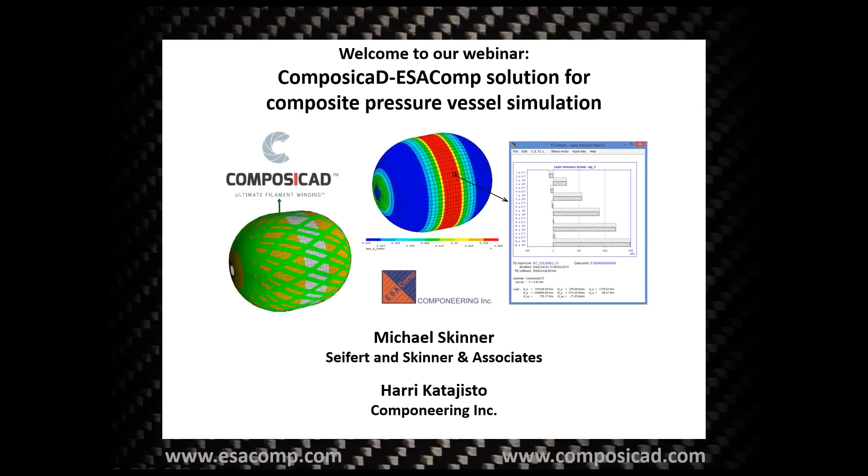To start with, just a short introduction to who we are. So from our side, Componeering, I'm giving the introduction, and then later Mike Skinner will tell about ComposiCAD and his company. So ESAComp is a software whose development was started already in the 1990s, initiated by the European Space Agency. It's a general composites design software meant to replace different in-house tools that were used in the aerospace industry. It's been developed by Componeering, our company.

We are based in Helsinki in Finland. We have also some staff in Central Europe, in Germany and France. Our activities focus on ESAComp software, but we do also engineering consulting. The customer base of ESAComp is quite vast. We have customers in more than 30 different countries all over the world. And all different industries using high-performance composites are practically covered today. Of course, because of our background in the aerospace industry, many of our most known customers come from that area.

ESAComp covers a lot, starting from basic laminate analysis, classical lamination theory-based analysis, first order shear deformation theory, and so on, focusing on the conceptual and preliminary design of composite laminates, but then going also into structural elements. We have a vast composite materials database as a starting point for design studies, and from ESAComp you can also export your data and initial designs into FE software, and even come back to ESAComp after the analysis done with the general FE software.

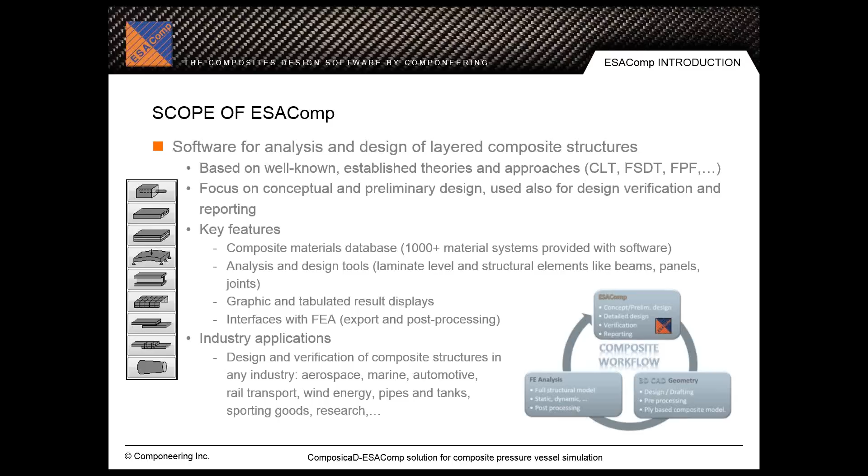Hello, this is Mike Skinner. I'm in Salt Lake City, very early in the morning here, but hopefully I can muddle through. I've got a cold, so if my voice sounds a little rough, that's why.

I'm going to first talk a little bit about our company, Seifert and Skinner Associates. I'm the guy in the hat. The guy in the red coat is Axel Seifert, my partner. We're actually standing in a wine field in France. This is a picture that was taken when we founded the company. We both have extensive background in filament winding for many years. And our company works in three main business areas.

We have what we call optimum CPV, which is our development facilities for developing and designing, prototype testing, and certification of composite pressure vessels. We actually have a laboratory in Belgium where we can produce these parts, test them, and come up with a good finished design. We also produce the ComposiCAD software, which is what I'm going to talk about in a bit. ComposiCAD is a fairly inclusive package that covers most filament winding. We do pipes, pressure vessels, of course, which is what we're going to focus on. But we also do curved structures like elbows. We have pipe tees. We do things that are called spars, which are non-round geometries, and a couple of other applications for ComposiCAD also.

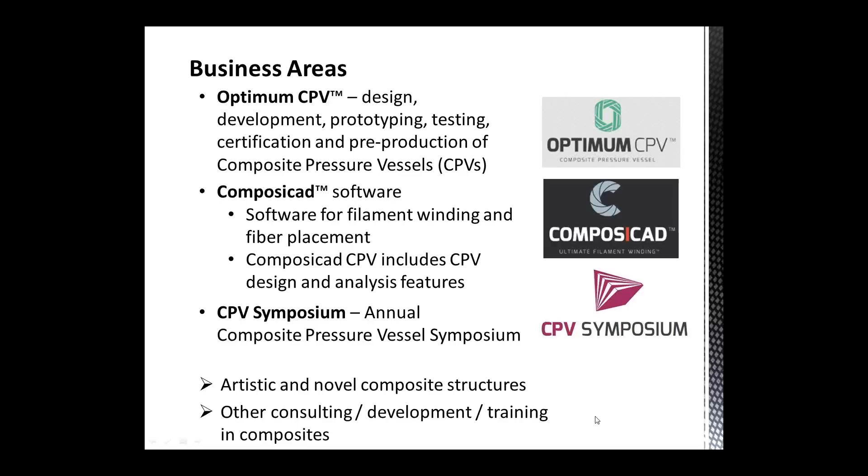And then we also do some other composite development work that is a fairly minor part of our business. We have associates all around the world. We actually have 3 offices. We have one in Salt Lake City, Utah, where I am, in Hasselt, Belgium, and in Mar del Plata, Argentina.

This is our development facility. We have 2 large winding machines, one single spindle and one 3-spindle machine for doing our development work. We have all the auxiliary equipment that you need to actually build and cure pressure vessels. We have testing equipment for both low pressure and high pressure testing, some environmental testing equipment, and we have ISO

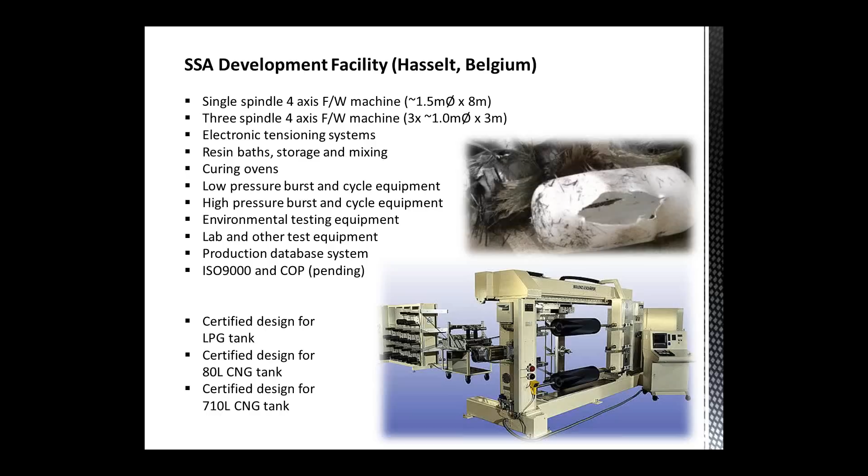9000 and COP pending. We actually have certified designs for several different types of tanks. We have an LPG tank design, which is a small low pressure tank, and we have 2 designs for CNG tanks. These are all type 4 cylinders, an 80-liter CNG tank and a 710-liter CNG tank, which we think is actually the largest cylinder ever to be certified.

Our main associates, we have associated companies around the world that we work with. Componeering in Finland, of course, is one. Composites in China.

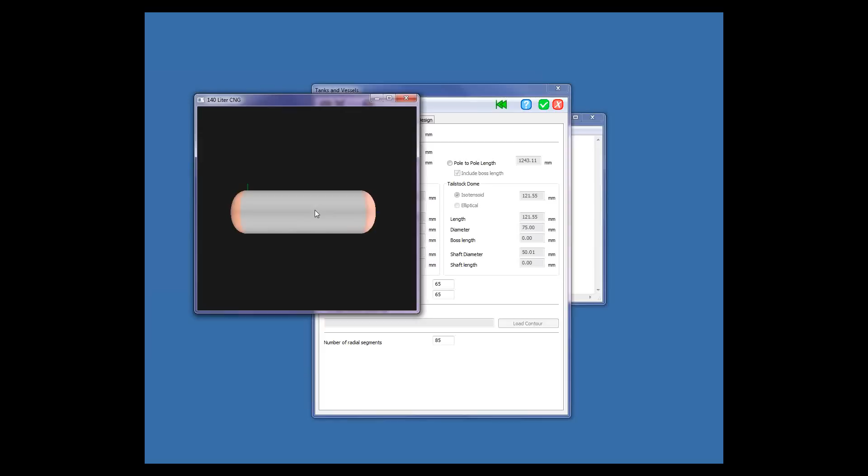And in this particular case, I entered parameters for a liner. This is designed for a 140-liter tank. This has isotensoid domes. Typical geometry. One of the more recent features that we put in ComposiCAD is a design tool that will allow us to estimate how much material we need for specific burst pressures.

This tool is based on netting analysis. It neglects all of the rest, and it looks solely at the fiber strength. It's a little more detail than we can go into here, but it gives you a good first approximation of how much material you need in a vessel for the required burst pressures.

So in this window, we can put in our operating pressure, desired safety margins, and come up with a desired burst pressure. Look at our helical to circ fiber stresses. We typically want our tanks to burst in the circ direction, not in the axial direction, not in the helical direction. We put in our parameters for the materials that we're going to be using, which we can specify.

Here we're looking at a T700 epoxy material. We specified two different materials, one for the hoop direction, one for the helical direction. This is typical because of the manufacturing process. With hoop winding, we're typically going to have a little bit wider bandwidth than we have with our helical winding, just because of the geometry and the mechanics of the winding machines.

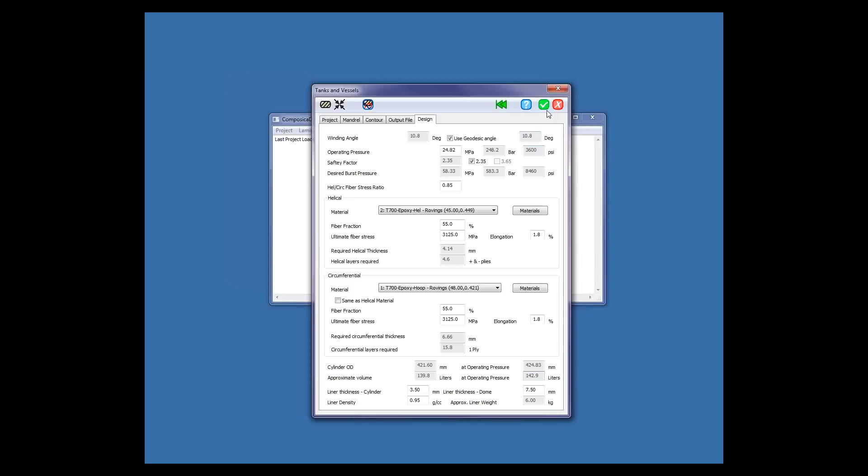And it also calculates our volume based on the information that we supplied. So unpressurized, our tank is 139.8 liters. At operating pressure, it's going to be 142.9 liters of volume. So now we can specify our laminate structure.

Again, ComposiCAD is parametric, so each one of these layers builds on the previous layer. This laminate sequence would be typical for a CNG type tank. We start with a hoop or circumferential layer. We put in some helical layers, another circ, some more helical layers, and then finish off with a circ on the outside. There may be other geometries that would work as well. This is not an actual tank. This is just something that we're using for demonstration.

But once we build this laminate sequence, then we can calculate all of our winding paths. Each one is based on the previous winding path and the buildup of the material that is put onto the part by that particular layer. Now we can look at our cross section. I'm going to expand this so we can see it a bit better.

This is just looking at the dome contour of the part, so you can see each layer that we're putting on. The green layers are actually the circ layers, which would be in the cylinder region, where the buildup's going to be. But we're looking at the helical buildups now, so each blue layer is a helical layer that we put on. So you can see that we're stepping back the helical to keep the buildup around the dome to some reasonable level.

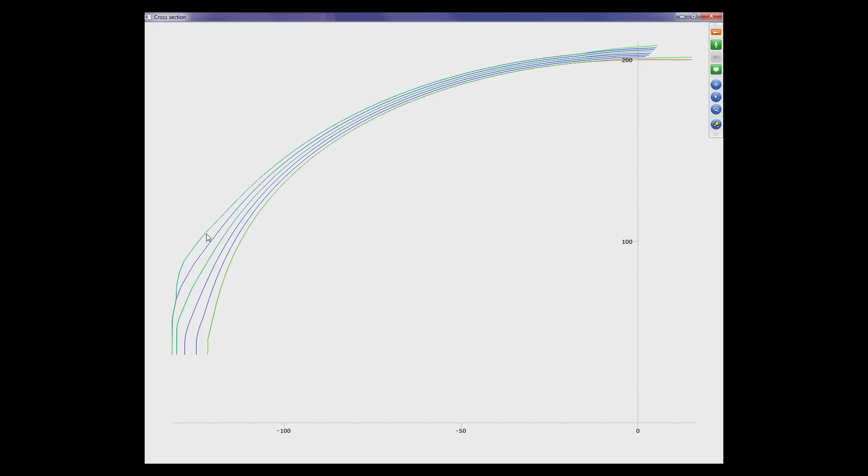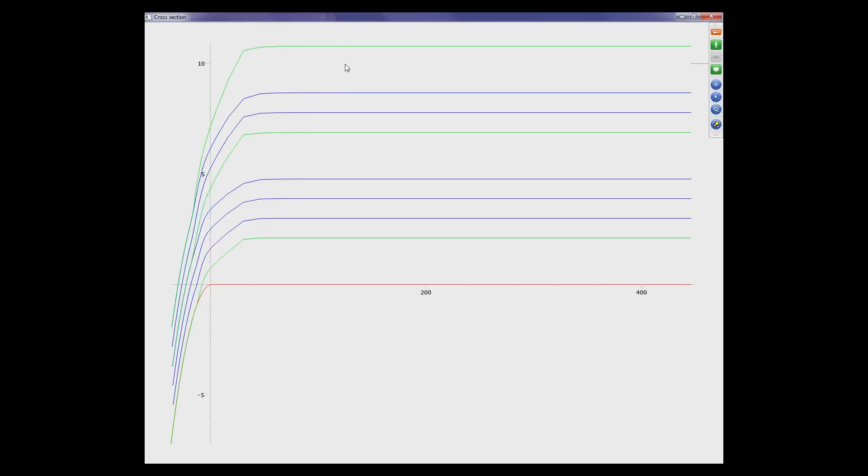Here's the cylinder region. Now this is the transition going into the dome from the cylinder. You can see our first circ, the helical layers, our second circ, some more helical layers, and then our third circ of the material that's being put on the part.

Now based on this particular laminate sequence, we can calculate the burst pressure again using our netting analysis. And from this, we can decide whether our design is going to be appropriate for the desired burst pressure. So based on the actual buildup that we have in the laminate table, the circs and the angles of the helicals, ComposiCAD will calculate that design burst pressure.

So using our design values, we have a circ fiber stress of 3125 megapascal, and helical fiber stress of 2656 megapascal for a stress ratio of 0.85 between those. That's a typical value for these types of tanks. Some people might go a little higher. But like I say, we want the stress to be primarily in the circumferential direction so that the failure mode is in a certain direction.

Now we come down, we look at our design pressures, and we say, oh, over 100% of our design pressures. It took me about 2 hours to actually do that, so it came out exactly 100%. But typically, you don't need to be 100%. You're looking for some value that's going to be close to what you want, and then, using some of the other analysis tools, we can tweak those values a little bit.

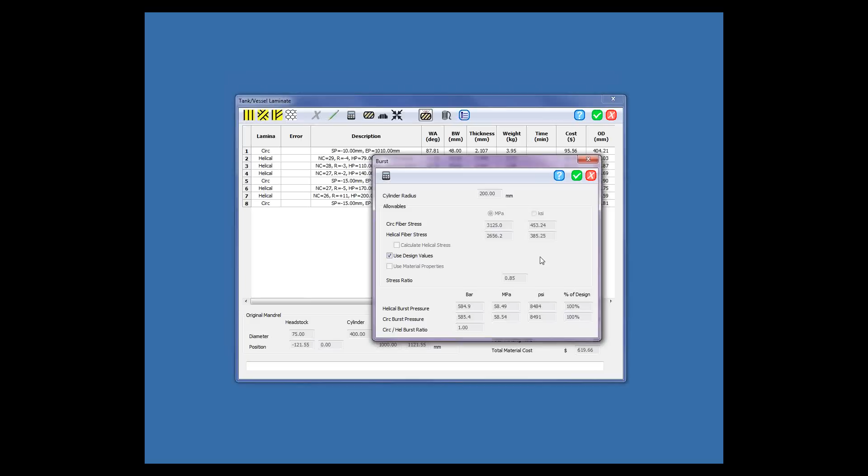And now we actually have our part. Everything's ready to go. We can export now to ESAComp. I'm just going to mention in passing, we support ESAComp. We have a couple of other FEA tools that we support also. We're trying to support most of the major FEA packages so we can export to them also. I'm going to export now for ESAComp.

We'll do a full part, specify our number of segments, direction. And we're just going to save that data. A few seconds to calculate it. And here's our finished part in ESAComp. And now I'm going to pass this over to Harri, who can talk some more about ESAComp, I think.

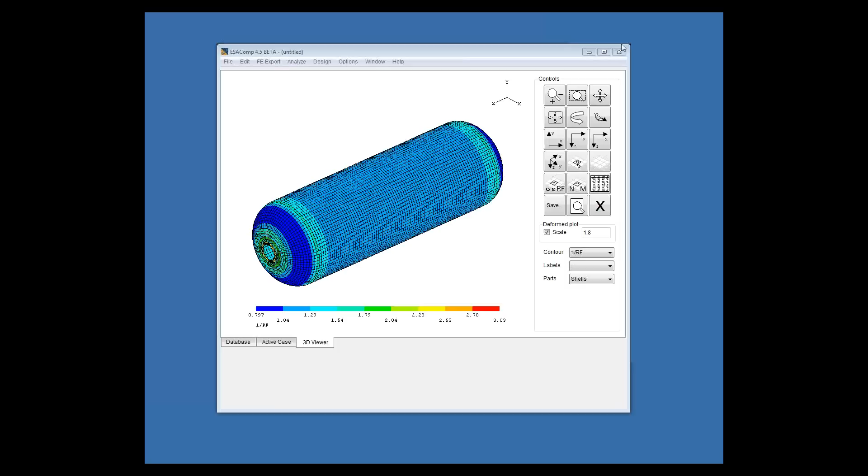Thanks, Mike. My name is Harri Katajisto. I'm an engineering consultant at Componeering, and I have around 15 years of experience from industrial composite projects. I have a background in mechanics of materials and lightweight structures, and I'm a member of the NAFEMS Composites working group.

So now I'm going to introduce you to the simulation part, and I'll shortly go back to ComposiCAD. So I have the same model here open, the one Mike showed you. You can see the geometry here, and also the mesh overlaid on top of the geometry.

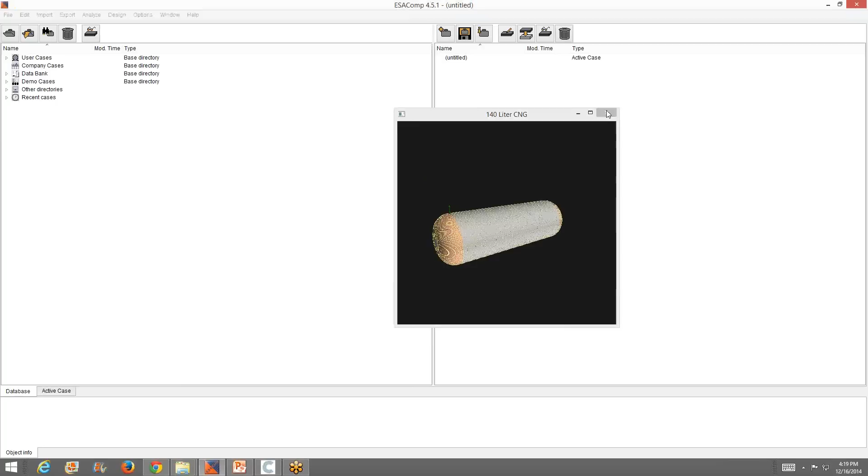Okay, and what Mike showed you about the export of data to ESAComp, I will repeat that one. So I select the ESAComp drop-down menu, and now that we do a structural simulation, and because the tank is symmetric, I just simulate the 1/2 to save some time in the computation.

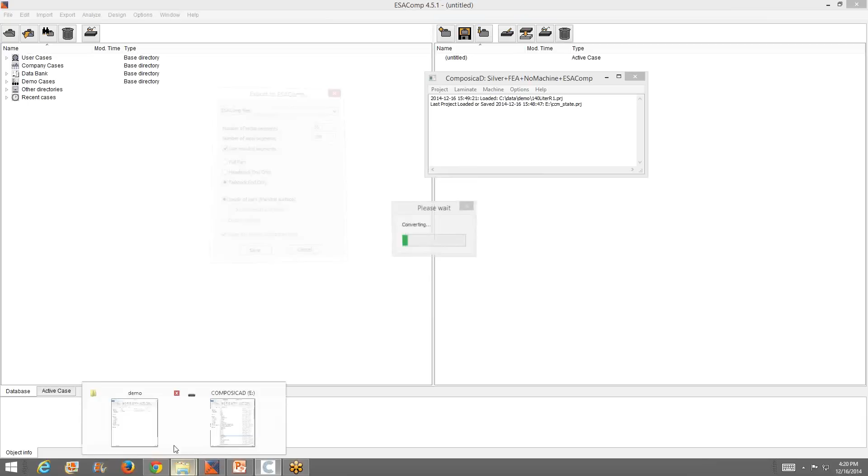I could use the default parameters for the mesh, but actually I will change the settings to the ones showed previously. So I will do the export. I will specify the folder for the different files, and here is the folder open. So basically

what is read in ESAComp is 3 files produced by ComposiCAD. 2 of them define the finite element mesh with shell elements and nodes, and the third one introduces the laminate data. Also, in this specific file, the materials are introduced, so you can cross-check that you have the same data used in ESAComp and in ComposiCAD.

Normally, when I work in ESAComp, I have a template file where I have introduced materials that have been used in the winding simulation, but now I'm starting from scratch, so I'm going to introduce these 2 T700 high-strength carbon fiber material systems.

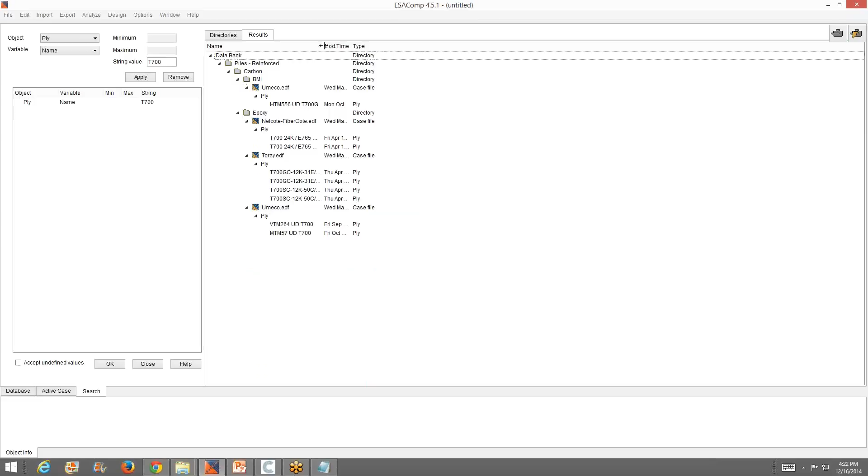What I'm going to do is I use ESAComp search function, and I will search from the database materials with ID T700 from the data bank. And as a result of the search, there are some systems matching with the search criteria. And for example, the one that I'm going to use is the one at the bottom from Umeco. So to introduce, the data has been gathered from the Umeco structural materials sites.

It's a UD system with a fiber volume content 56%, so sufficiently close to the one Mike used in the winding simulation. There are engineering constants and then nominal failure values that are going to be used in the simulation. These are the nominal values for the UD laminates, but I'm going to introduce another strength set here, which I'm going to use in the later phases of this demonstration.

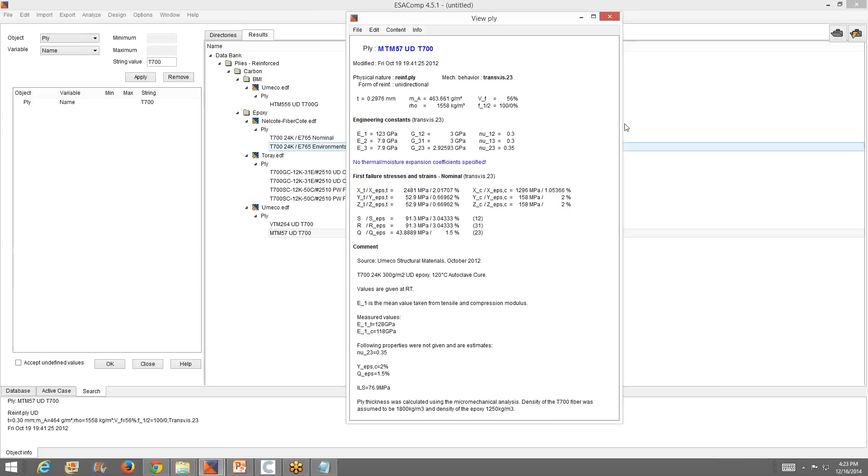So I will import the material into the working project, and I will close this search function. So I have here the material system, and I will modify the data by introducing an additional strength set called fatigue.

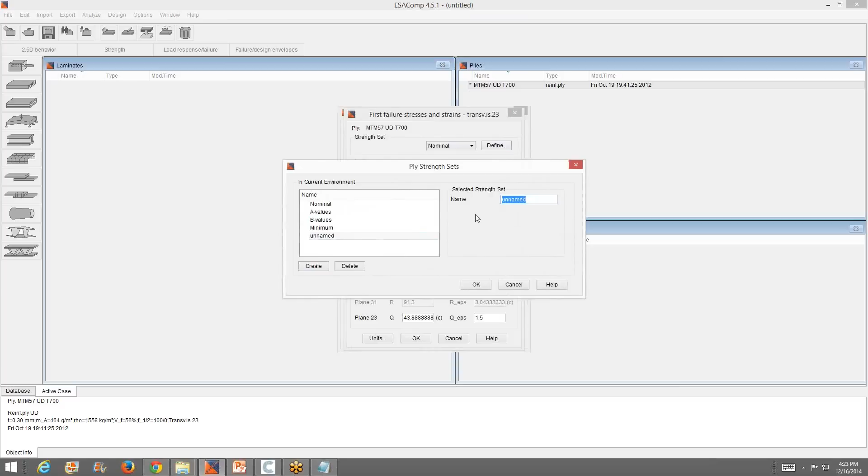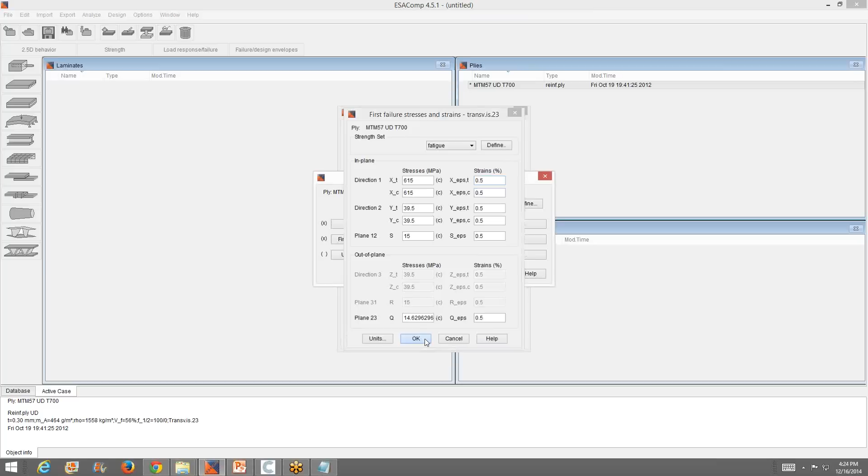Well, let's say that based on my knowledge, I think that 0.5% global strain level is a good approximation for a certain number of load cycles. So that in a simple manner presents the fatigue limit for this material system. And now, in addition to the nominal values, I have the fatigue values here based on the 0.5 strain level.

Before performing the actual simulation, I have to give a material ID for the material system so that it matches with the material system of the process simulation. So I will go back to ComposiCAD and then materials. Mike showed you this specification window. So in ComposiCAD, material ID 1 is used for a hoop.

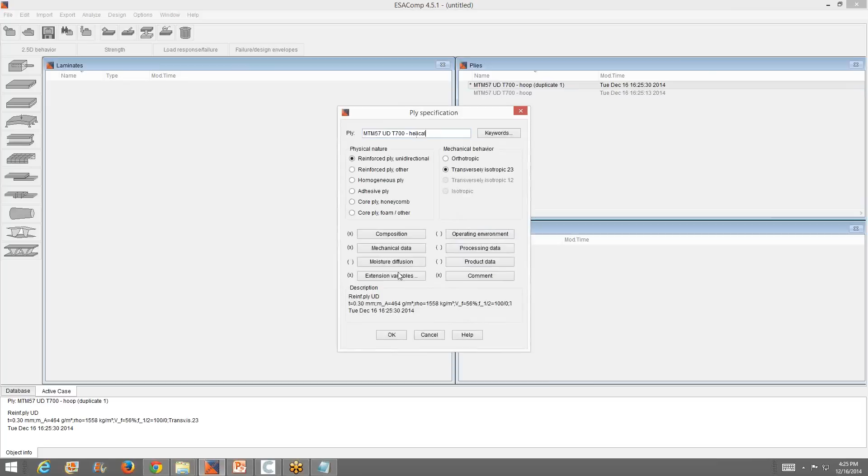So I will slightly modify this. I will define hoop and then define the actual material ID so that it matches. And then in the structural simulation for the helical layer, I will use the same structural mechanical properties as for the hoop layer. So I just duplicate this material system. Modify the name just to identify and give a proper ID.

So when you repeat your analysis, the previous steps you don't have to redo. This is something that you can take from the template file. Now I'm going to the actual simulation. So I just read in the data from ComposiCAD. I specify the file,

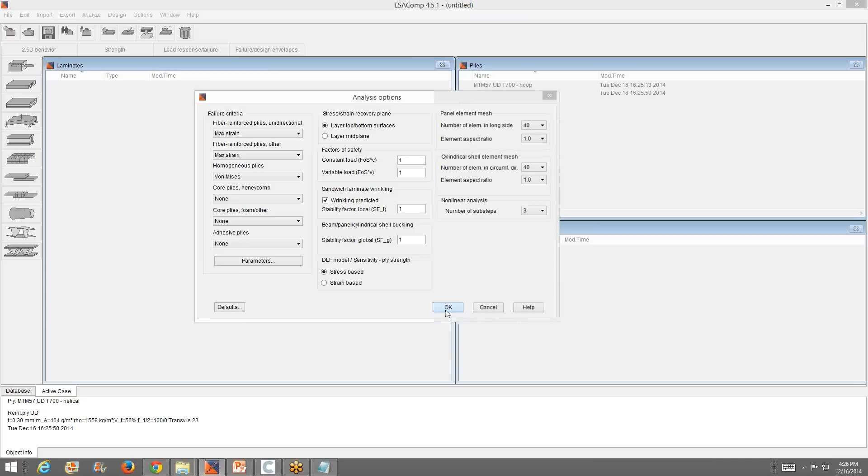and before launching the simulation, I can select the failure criteria that is going to be used for the UD material system. There are different criteria available, but I start with the max strain criteria. I start the simulation, and it takes like 10 seconds to run the simulation, and now it shows you the half tank. So we just simulate one side of the tank due to the symmetry.

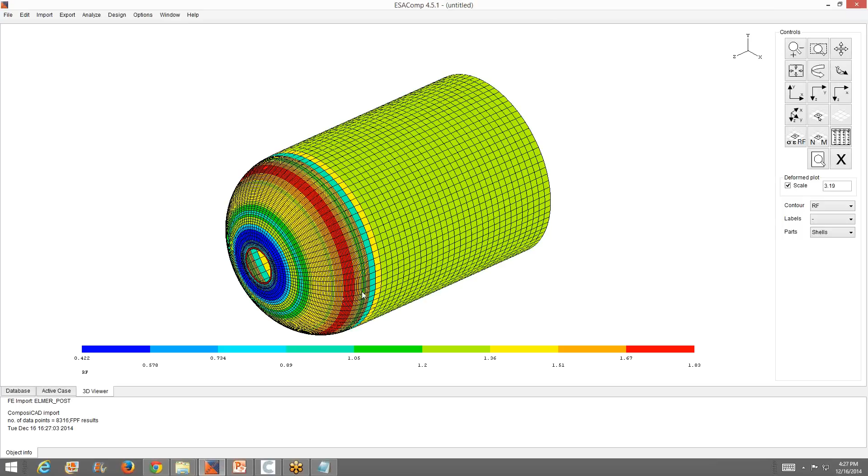RF indicates reserve factor for the laminate, so it takes into account all the layers of the element. So it's like piercing through the laminate, and then giving the indication what is the reserve factor according to the weakest ply of the laminate.

The critical layer information can be seen on top of the laminate. So, for example, in this region, it's the layer A. A stands for the layer that is introduced first in the laminate. It's aligned in -88 degrees. So from that information we can judge that it's a hoop layer.

Failure mode. In this region, for example, it's 2T. T stands for tensile failure, and 2 stands for the principal direction 2 of that specific critical layer. This information naturally depends on the selected failure criteria. Now we have selected the max strain criteria.

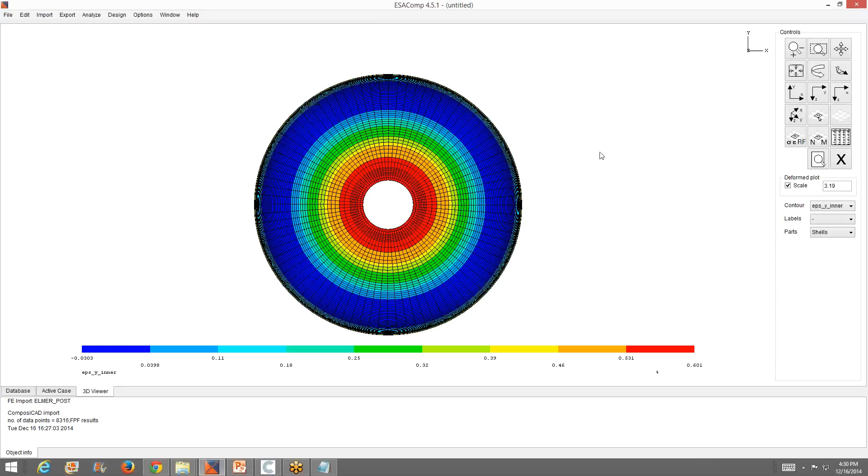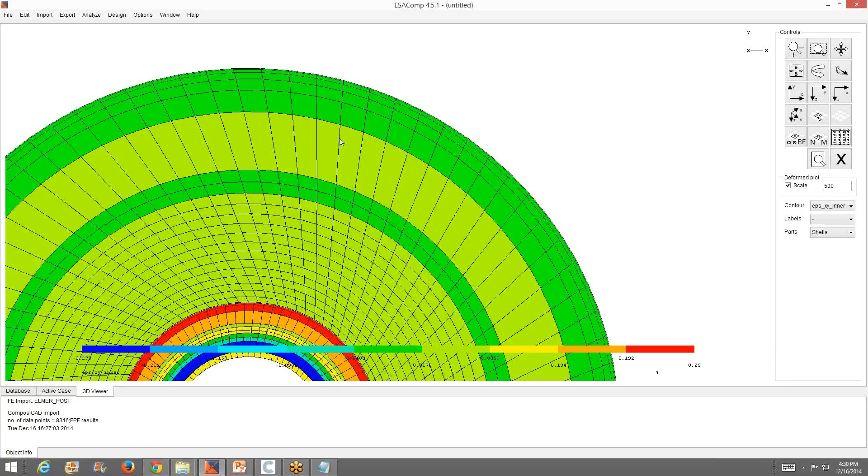I will take a view from dome direction, and now I will plot the in-plane shear. I will scale a little bit, or actually quite a lot, the deformation. And you can see how the tank distorts. So because the laminate structure is not symmetric, there's a bending moment in the dome region, and therefore the tank shears.

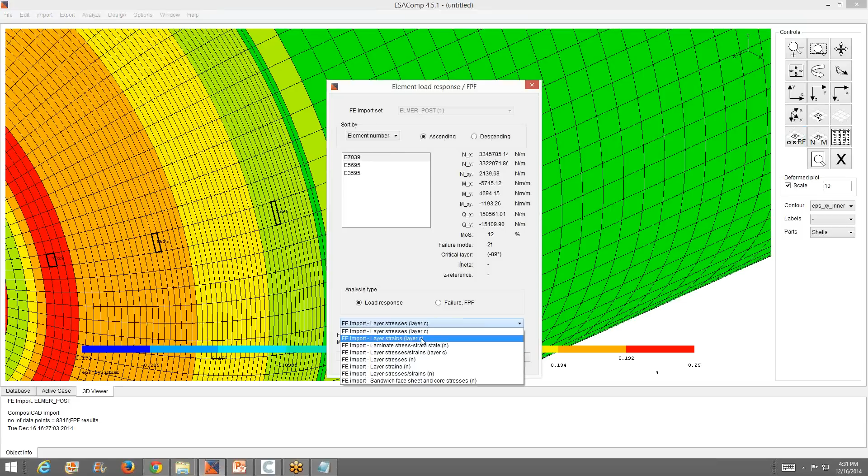One can do a point-wise analysis, so that means that I can pick elements from the model and study locally, for example, strains either in the local coordinate system or global system. So this one is for that point here, the next one.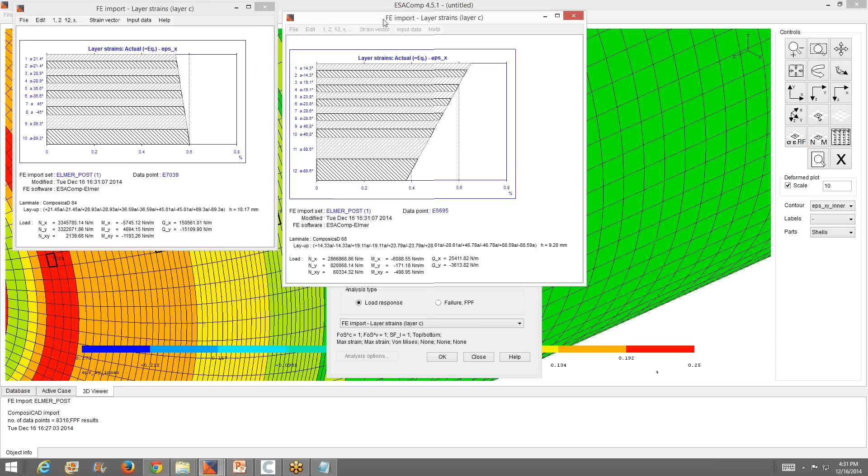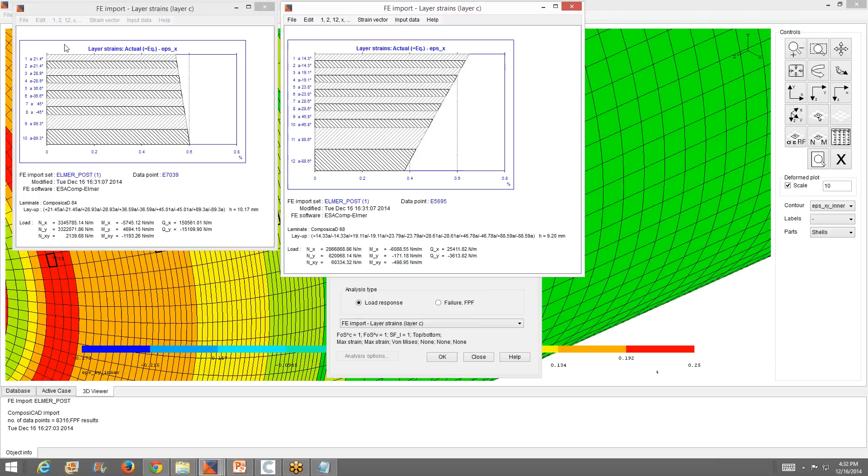And then so on. So here you can see the different layer orientations, and for example the layer that is in 14.3 direction at this region, it's heading to the point where it turns to the opposite direction, and the orientation has increased to 21.4. So one can do this kind of local studies.

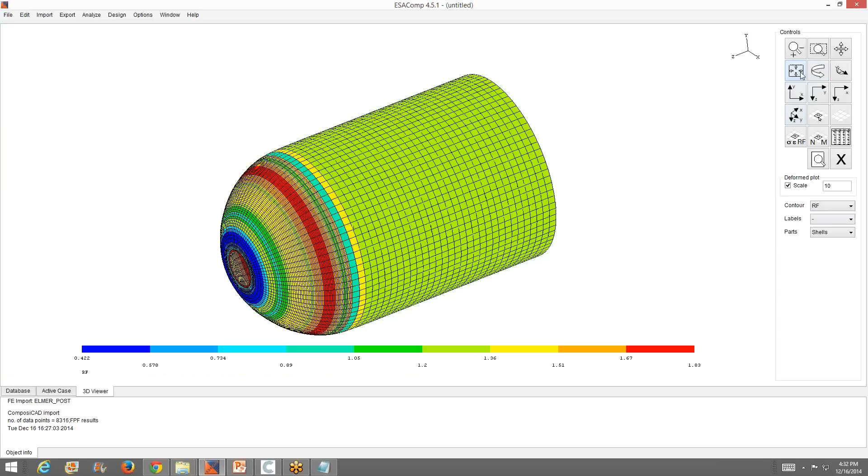Back to this reserve factor, and this is something interesting region here. Why the reserve factor is lower at this region, and the mesh is rather coarse. So I decided to make another design loop with different mesh parameters.

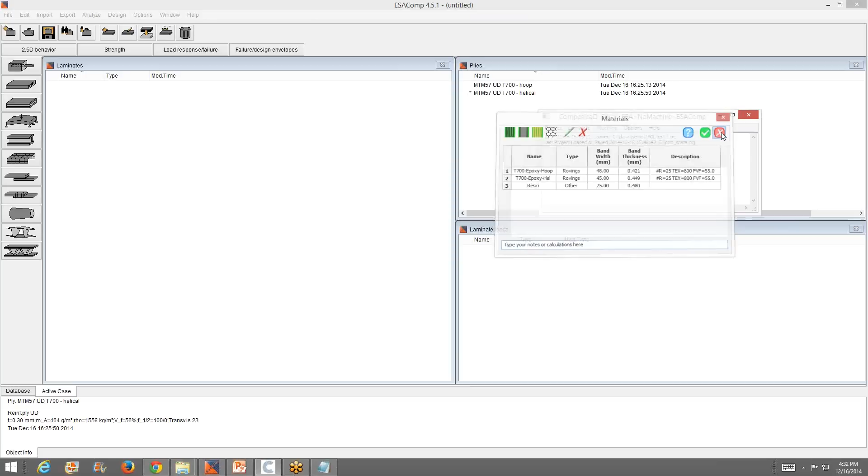So I can go back to ComposicaD. I will go to the actual project and the mandrel data. So here was the original mesh and original length. For the second round simulation, I will shorten the tank. It doesn't influence the results at the region where I'm now focusing. I will slightly change the mesh parameters.

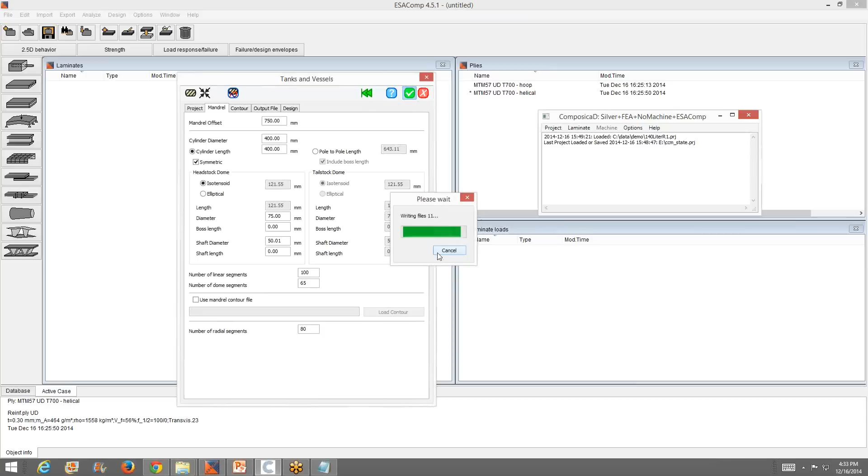And the paths are recalculated, and I will export the data to ESAComp, tailstock end only, and I have the updated data in my demo folder. Basically, I could rerun now the model, but I will do one more modification before rerunning the simulation.

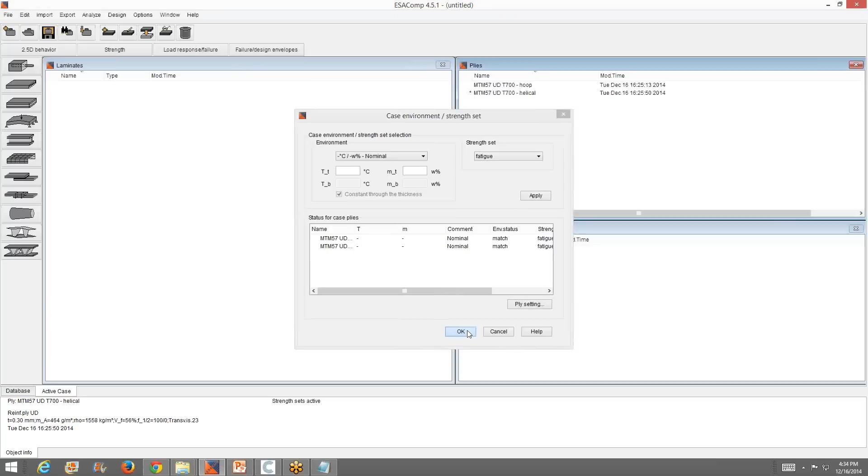So I will go to the options, and I will now activate the fatigue values for the failure analysis. Previous analysis was made with the nominal values, but now this one with fatigue values. And I will repeat the analysis, and again it's something like 10-15 seconds calculation time, so it's really responsive.

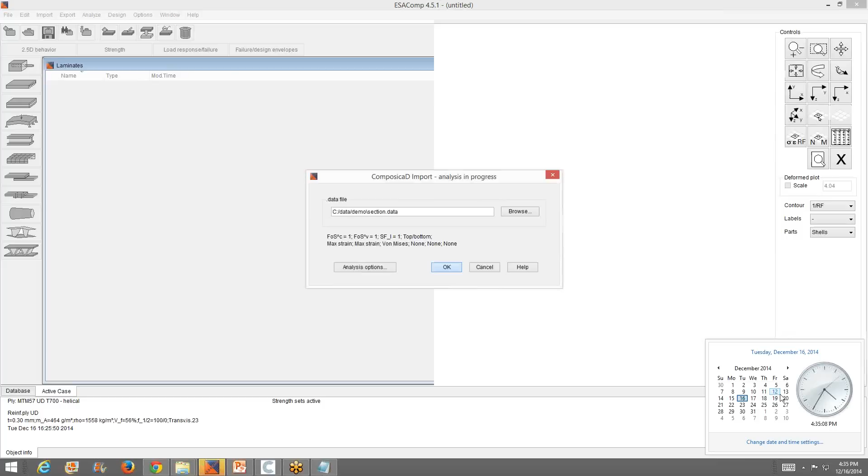You can do a lot of what-if studies, like if you see something, you want to try something, you go back to ComposicaD, make the modification, and then export the data back to ESAComp and then rerun. So now the mesh is different.

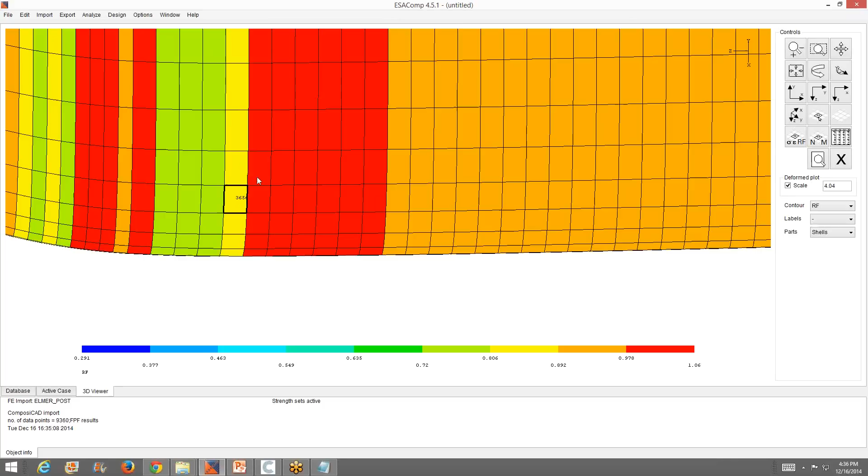Still there's some oscillation of the reserve factor at this region, and I will make a point-wise analysis at this region. So far, the failure analysis has been made only using in-plane failure criteria, but by experience, you may know that the typical region where the tank fails is this one. So let's take a look at this region more closely with the local analysis.

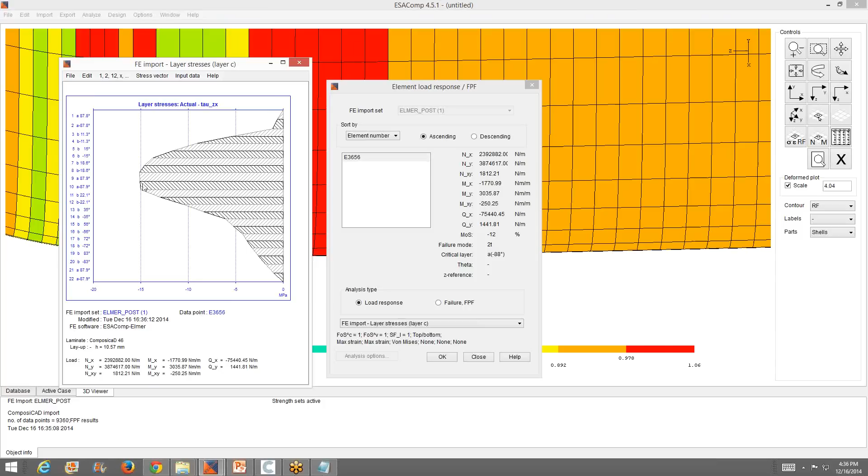And the strains, there's nothing exceptional. They are pretty close to the fatigue limit that I have used. But I will take now the stresses, and more specifically I will take an out-of-plane shear stress. So it's moderate in this region, 15 megapascals.

Let's study the neighbors, or better. Actually, there's a better thing to look at, the result item QX. It indicates out-of-plane stress resultant. So previously I showed you the out-of-plane stress distribution. This QX is like one item that shows the resultant of all the layers.

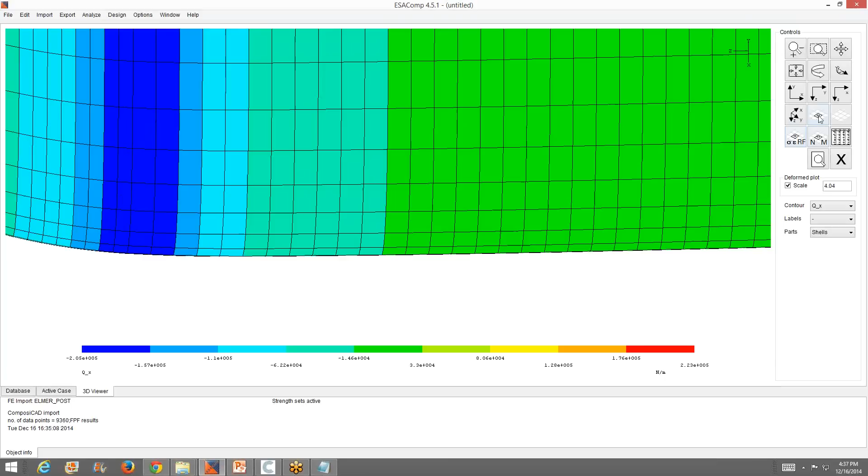So this gives you a nice overview where you have an oscillation of the result items. So in this region, QX has a high peak, and I will pick an element from that region. And I study that one locally, and it's over 40 MPa.

Actually, it wasn't straightforward to find that critical region from the model. So I will go once more back, and I will change the analysis options so that also the out-of-plane is considered. One possible way is to select max stress 3D failure criteria and repeat the analysis. And waiting for the results.

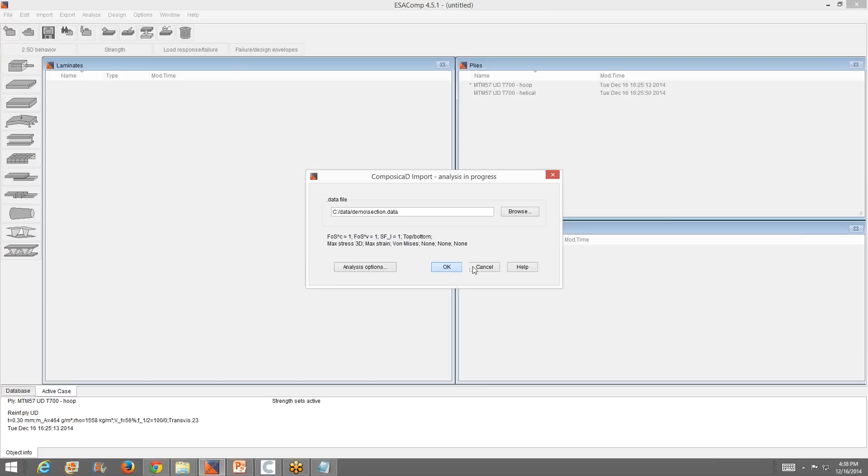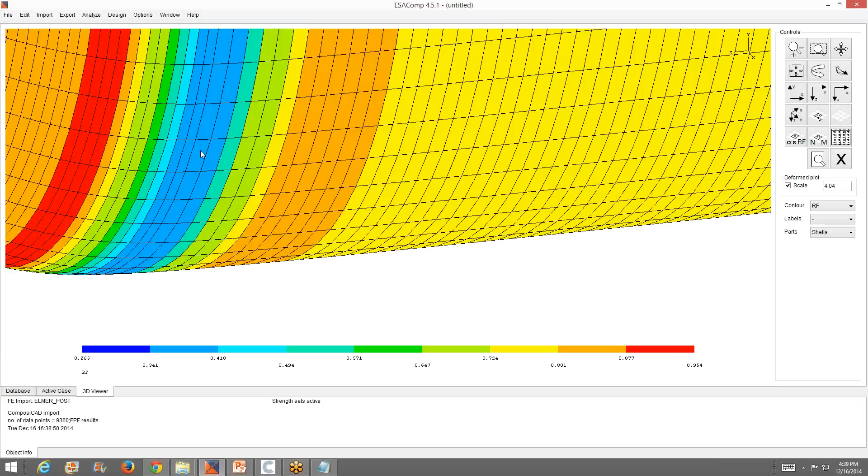And now we have a clear indication that this region is a potential location for failure due to the high out-of-plane shear stresses. So potentially these high out-of-plane shear stresses induce delamination, and delamination increases, and that makes the tank fail during the cyclic loading. So this QX was quite a good result item to reveal that there is some change in the structure at this region.

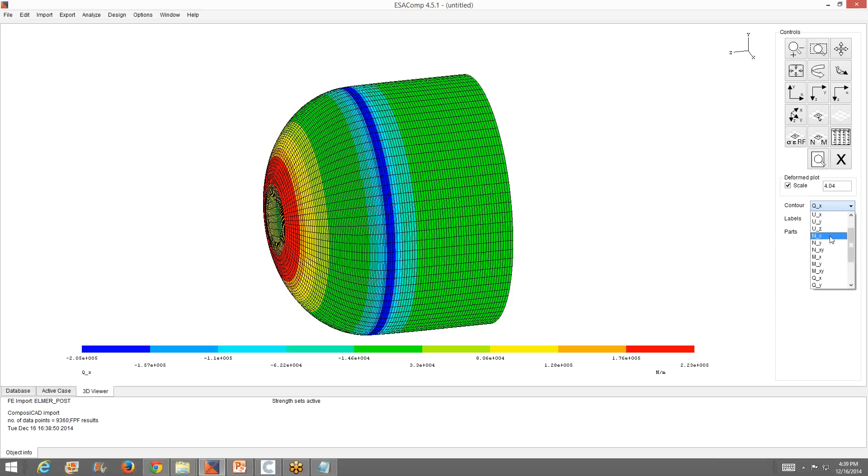Other result items like NX indicate the stress resultant in the in-plane direction. So these are quite useful to see how the structure will change the state from one to another, moving from the tank part to the dome. We also have capabilities like the data can be visualized in numerical formats, it can be exported to Excel, for example, and then the data can be processed in Excel if you find that a good way of working.

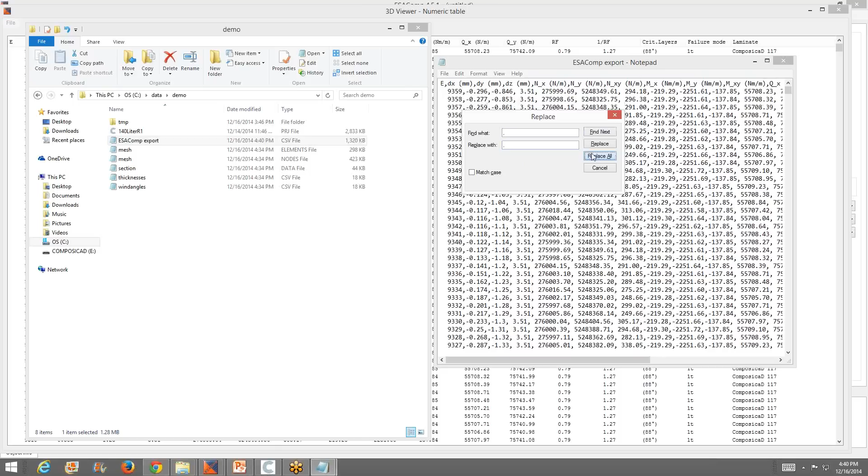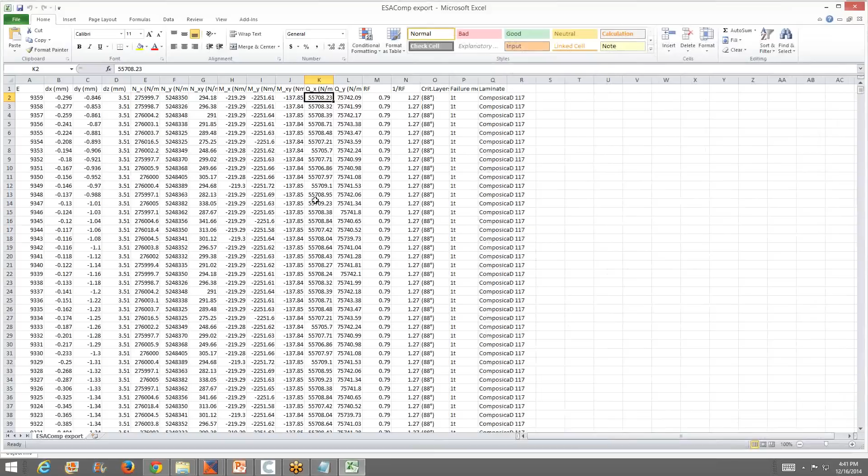I will actually modify these semicolons to commas and open that in Excel and show you the QX, how it makes a high peak at the transition zone where the cylindrical shell part ends, and we move to the dome.

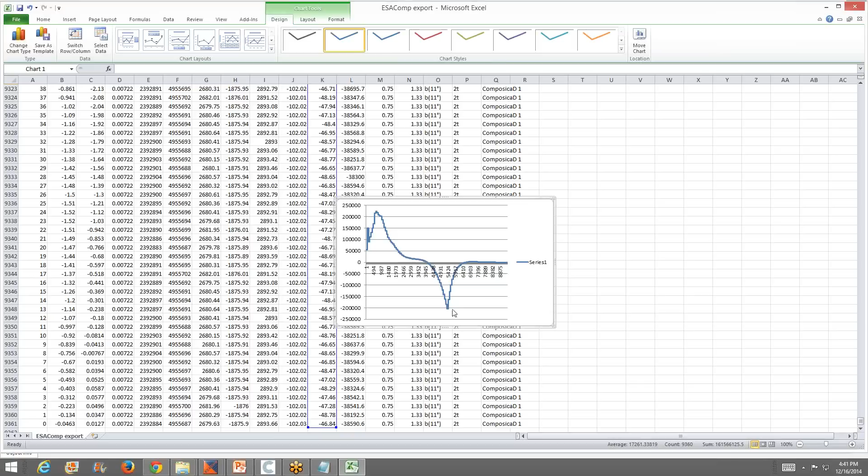Okay, that was my part of the presentation, and then I would like to conclude and summarize that this package of ComposicaD and ESAComp basically combines all aspects of the product development of pressure vessels, since manufacturing and the shape are considered on the ComposicaD side. Materials are also included in ESAComp, and the actual function is verified and simulated in ESAComp. So our approach is that you design something in ComposicaD, first see that you can actually make it, and then see if it's feasible.

I demonstrated that the tool is really responsive, and therefore it's really a design tool. You can make efficient what-if studies. It's cost-effective and still it doesn't trade off accuracy, so it's on the same level as the commercial FE tools. Only less effort is needed in the design work and in training for the tools. Software development is always a continuous process, and certainly there are things that we have in mind and want to develop. But at the moment, it's really a mature tool for the industry.